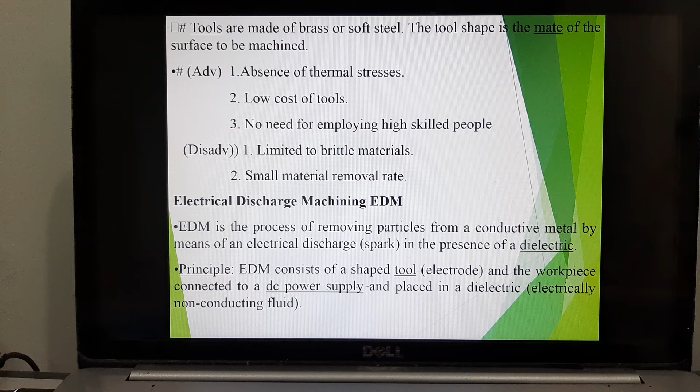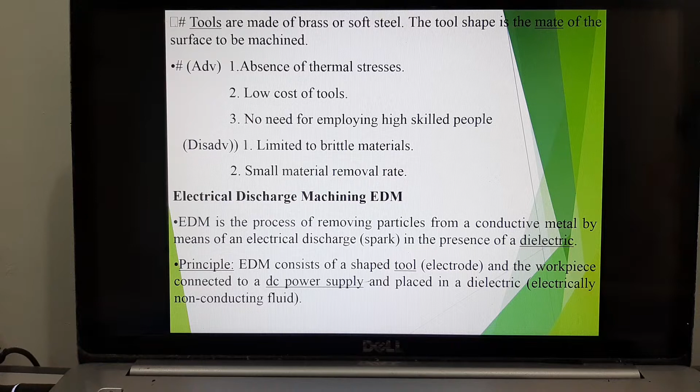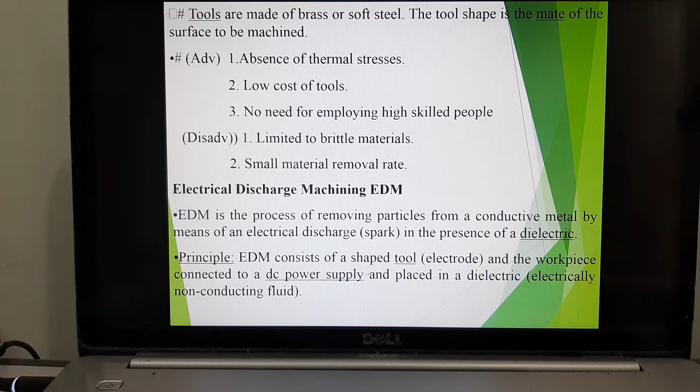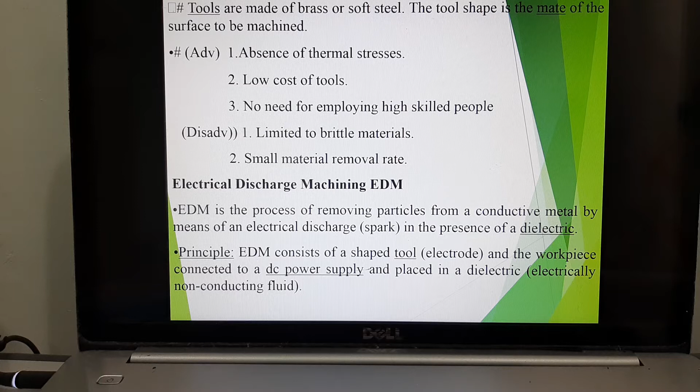If you recall, in the last class we spoke about ultrasonic machining. It was made of a transformer that generates electricity and ignites the transducer. The transducer oscillates at 30 or 25 kilohertz, causing the tool to oscillate and stir the abrasive solution, made of silicon carbide, aluminum oxide, and boron carbide. The abrasive liquid rubs against the surface of the workpiece and removes material.

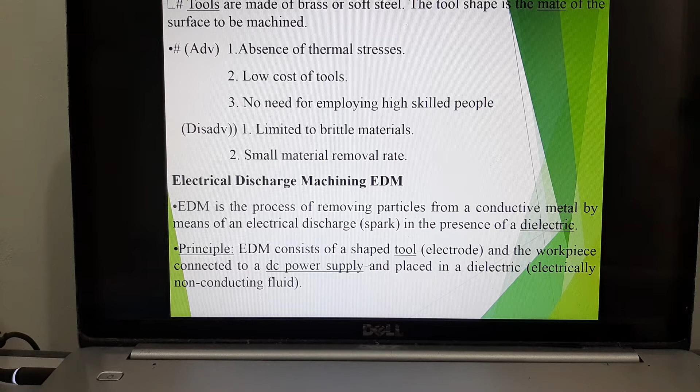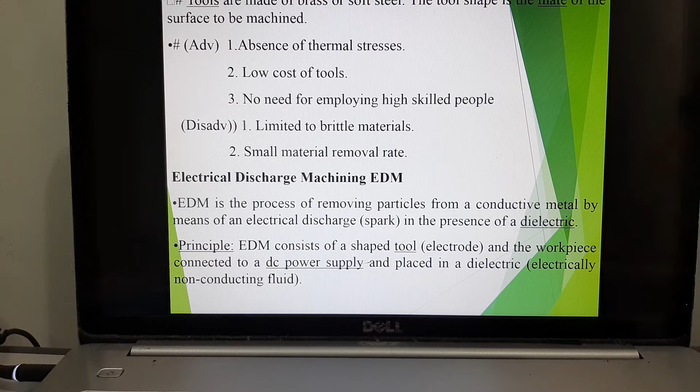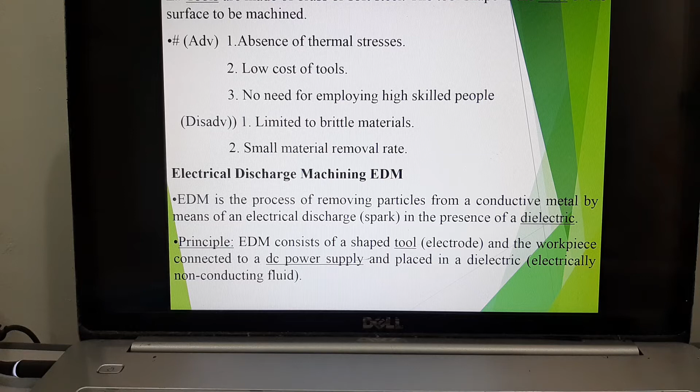So when it's removing or machining the material, is it visible? No, it's not, because you're removing micrometer or nanometer size material. It's very minute, not visible to the naked eye. That's why we have a mainframe to monitor the material removal rate in the X, Y, and Z axis. Once it has achieved the value you want, you stop the machining process.

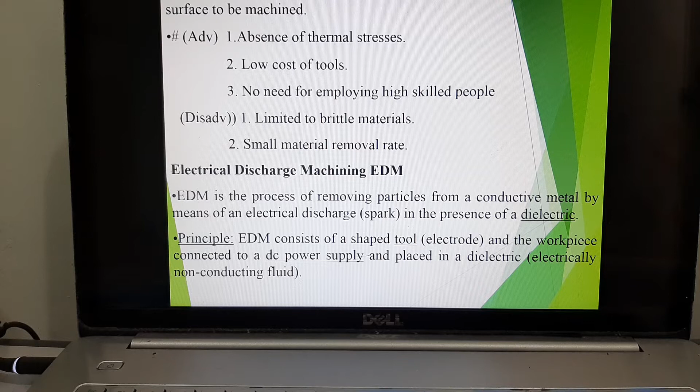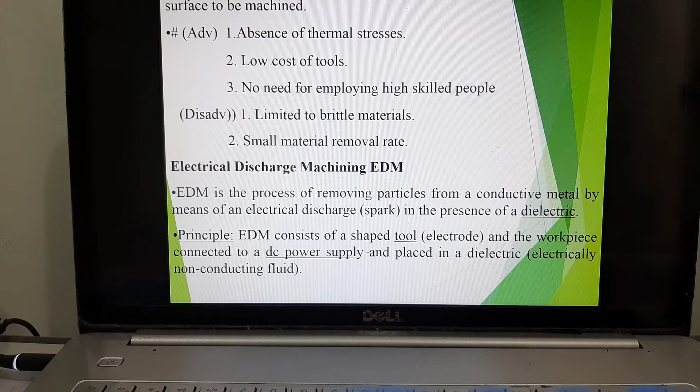Because of that very reason, you choose to do ultrasonic machining and not normal conventional machining. So moving on, let's look at the next one: electrical discharge machining.

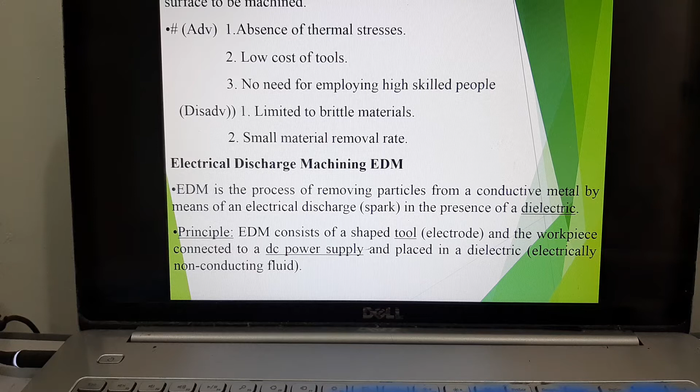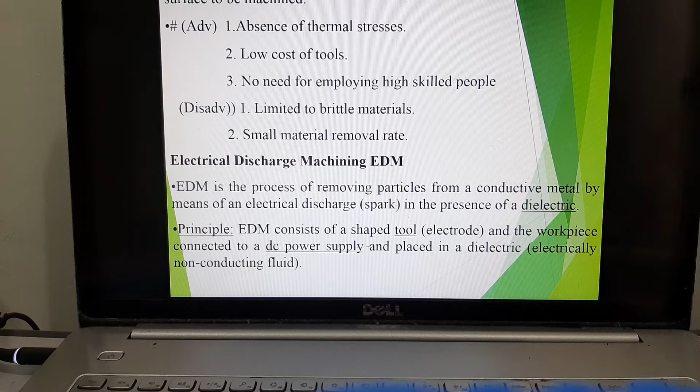EDM, or electrical discharge machining, is the process of removing particles from a conductive metal by means of an electric discharge in the presence of a dielectric. The key word here is conductive material. Your material has to be conductive, meaning it has to be a metal. Only metal conducts electricity. Any kind of metal can be machined under EDM.

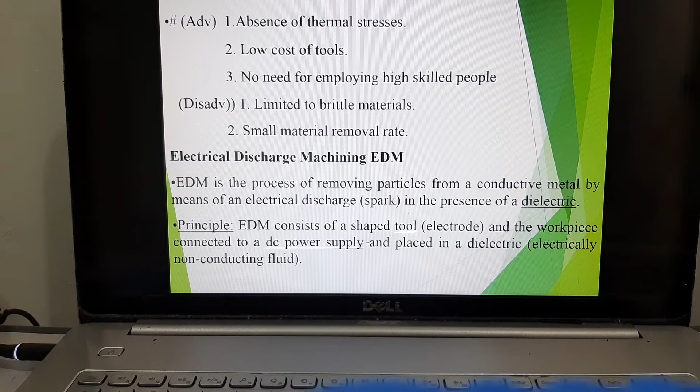Can you machine ceramic? No. Can you machine glass? No, because it is a non-conductive material. So how does this EDM work?

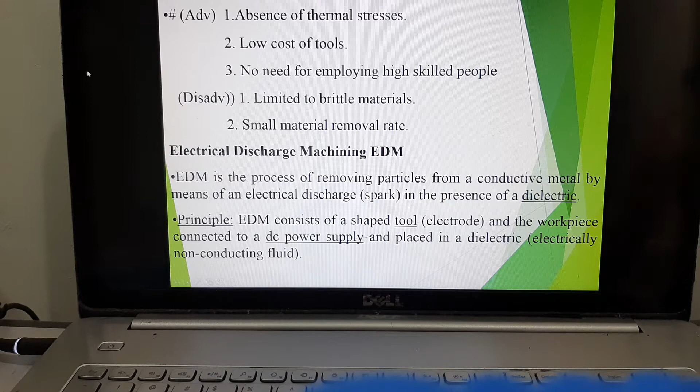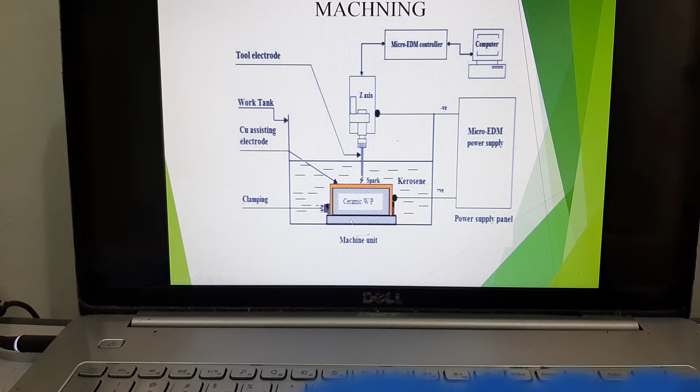EDM consists of a shaped tool or an electrode, and the workpiece is connected to a DC power supply placed in a dielectric. What is a dielectric? It's an electrically non-conductive fluid. Here is your workpiece, placed in kerosene, and it has to be a conductive sample.

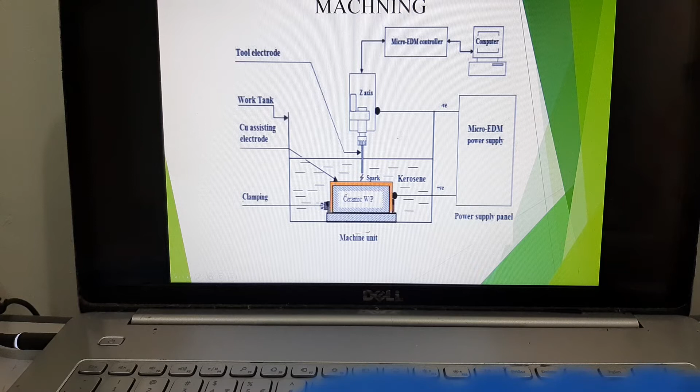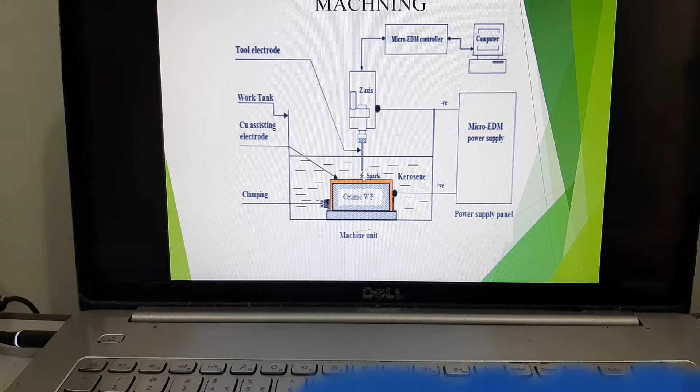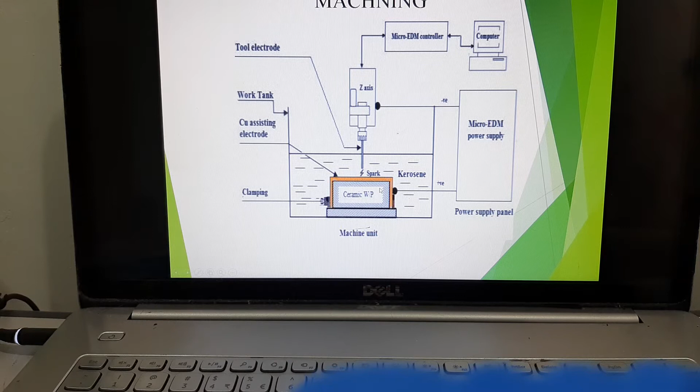When you immerse it in kerosene, there has to be a space between the electrode and the workpiece, because that space allows you to ignite a spark. Every time a spark is discharged, machining takes place. It removes a layer of material, but not a specific shape. If you want to cut out a butterfly shape, can you do it here? No, you cannot. It's just for very basic machining.

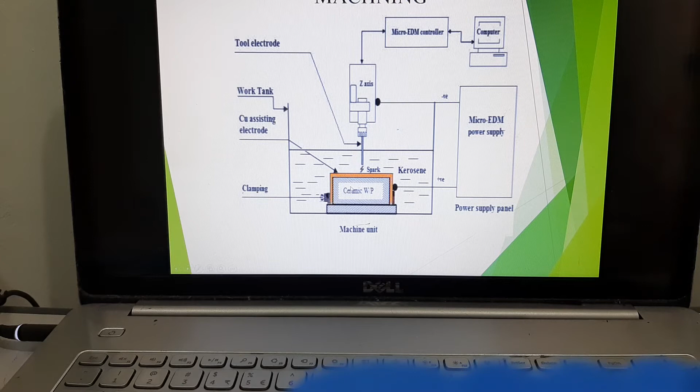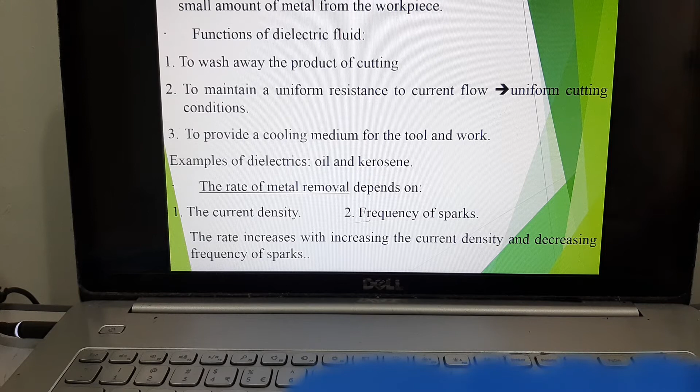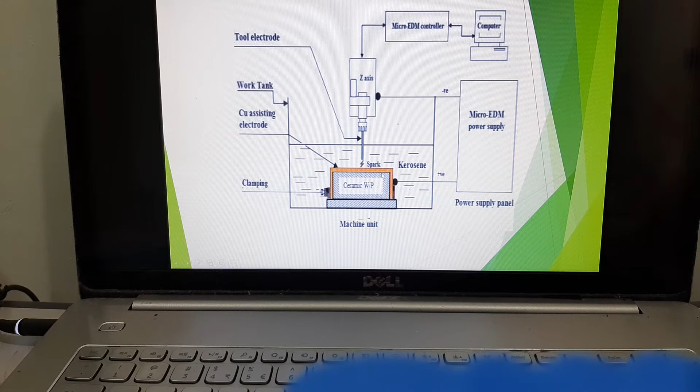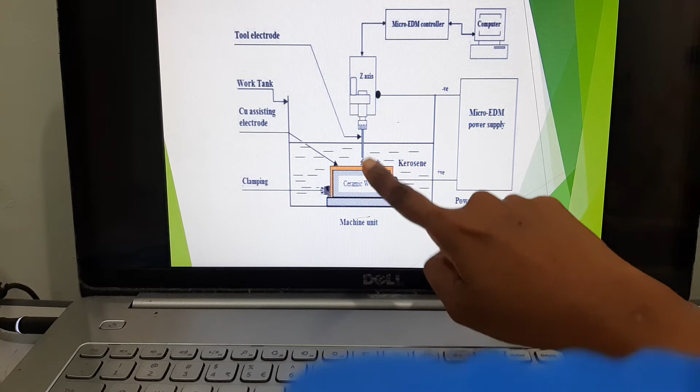Looking back at the description, when the potential difference between the tool and the workpiece is sufficiently high, it overcomes the dielectric. Here kerosene is your dielectric, with a positive and negative terminal representing the tool and the workpiece. When the potential difference is sufficiently high, it starts to discharge a spark, and every time a spark is discharged, material removal takes place, in the micrometer or nanometer range, overcoming the dielectric fluid.

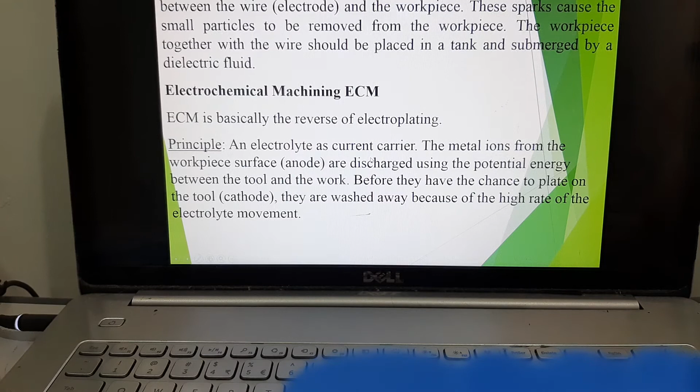Functions of a dielectric fluid - in our example we used kerosene. What's the function of kerosene? To wash away the product of cutting, to maintain a uniform resistance to current flow, meaning when there is sufficient potential difference it discharges a spark, so current is conducting. This uniform resistance gives uniform cutting conditions, and it also provides a cooling medium for the tool and the work. Examples of dielectrics are oil and kerosene.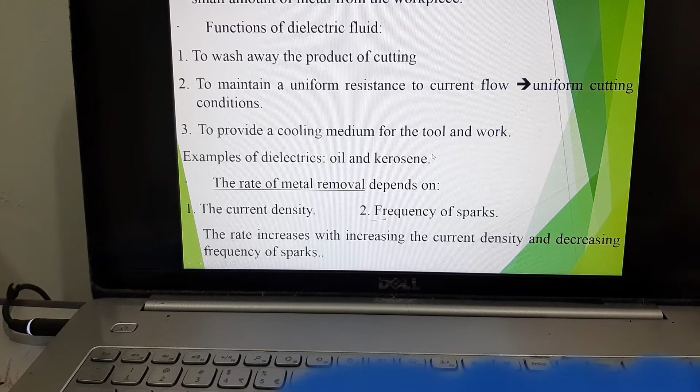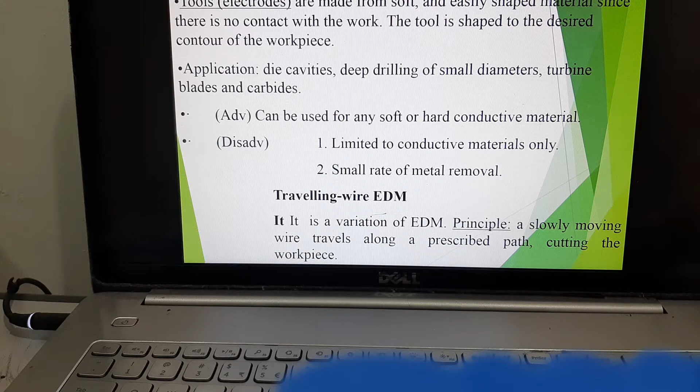So your tool has to be designed or shaped to the desired contour of your workpiece. How you want your workpiece to be, that's how your tool is going to be shaped.

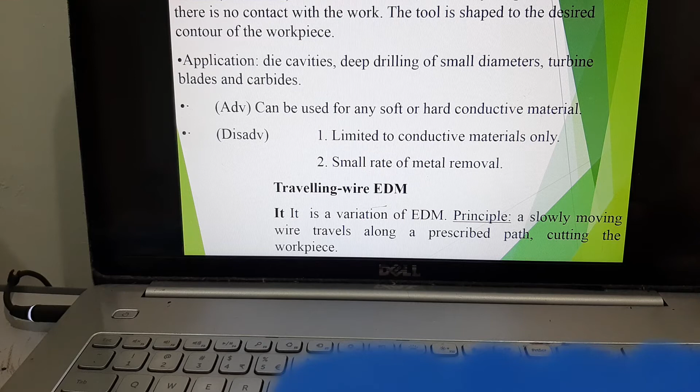So where do you use this electrical discharge machining? In die cavities, deep drilling of small diameters, turbine blades and carbides.

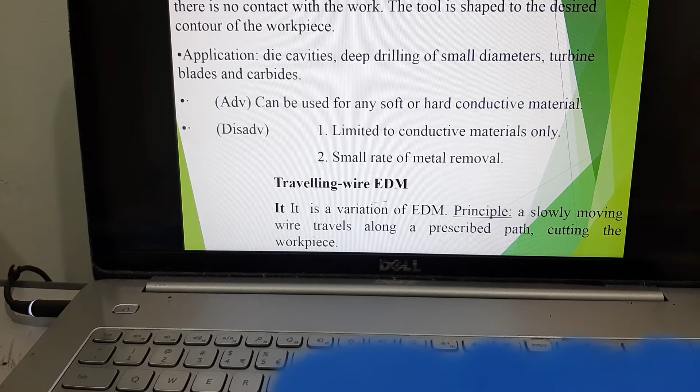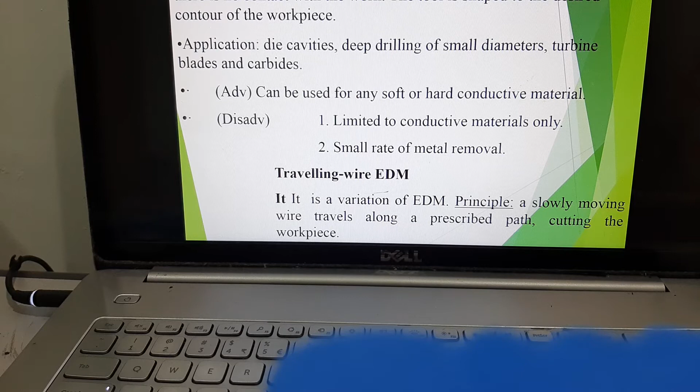Advantages: it can be used for any soft or hard conductive material. Disadvantages: it's limited to conductive materials, you cannot use it for a non-conductive material, and it has a very small metal removal rate, very very minute, removing nanometer, micrometer size material. So it's more of a precision machining rather than large scale machining, or macro machining.

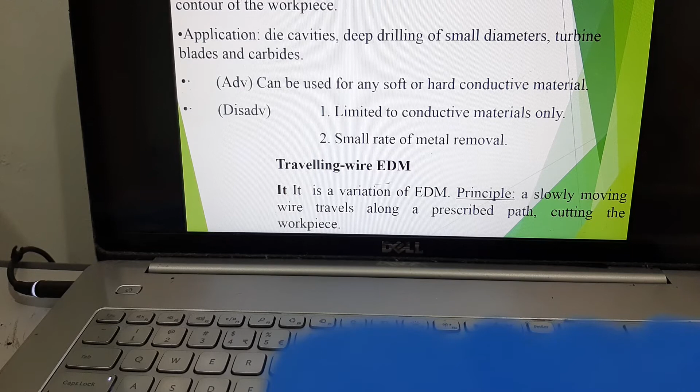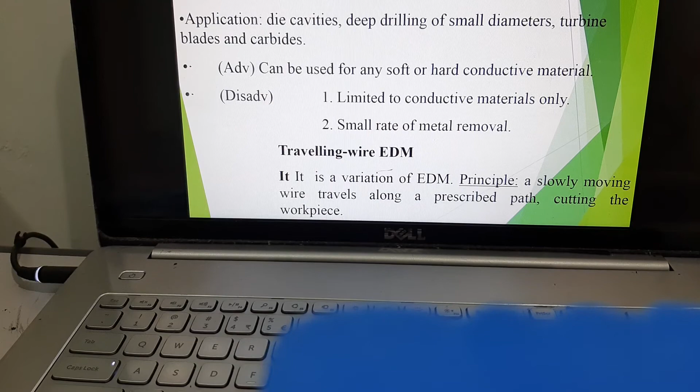If you're going to remove lots of material, then you might as well use some other processes like metal cutting, or you can use CNC lathe, CNC mill. But in this case, because you're doing micro machining, meaning you're removing micrometer and nanometer range materials, you need to use this particular material machining technique.

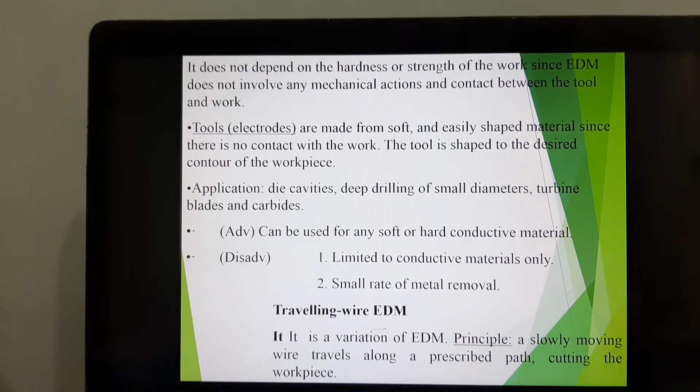So next one, traveling wire EDM. What is traveling wire EDM? It is a variation of EDM. A slowly moving wire travels along a prescribed path, cutting the workpiece.

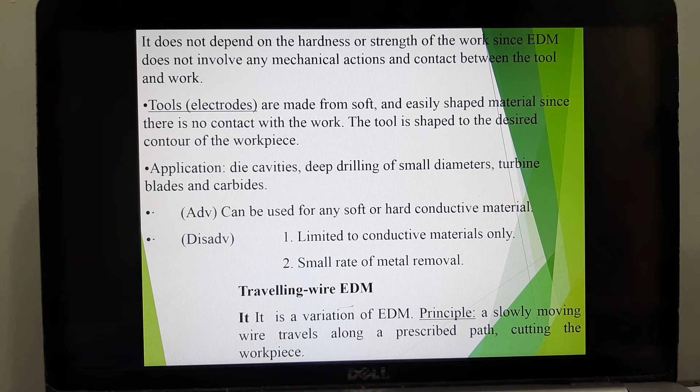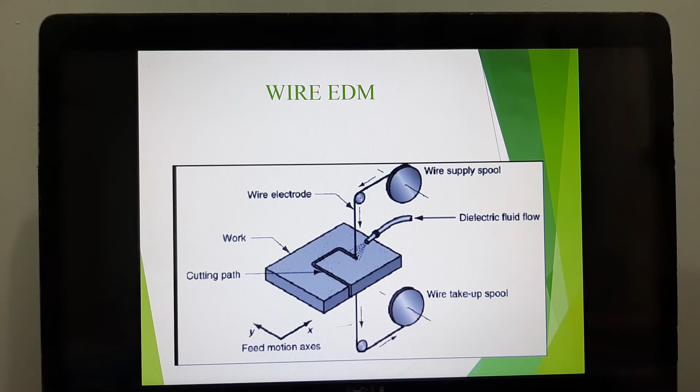If you look at the diagram, this is your wire EDM. You have your wire - the same concept. This is your wire electrode and this is your workpiece. When the potential difference is sufficiently high between the electrode and the workpiece, it will discharge sparks and it will machine.

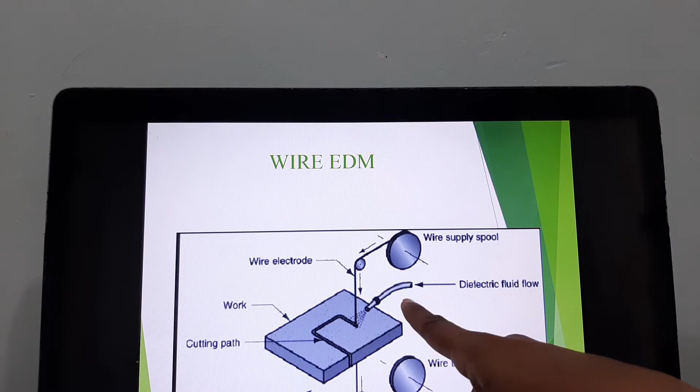And you're going to supply the dielectric fluid through a hose. So what you see here, it's like taking a scissors and cutting out the shape. You're doing it with a wire. The wire actually follows the dimension that you have given.

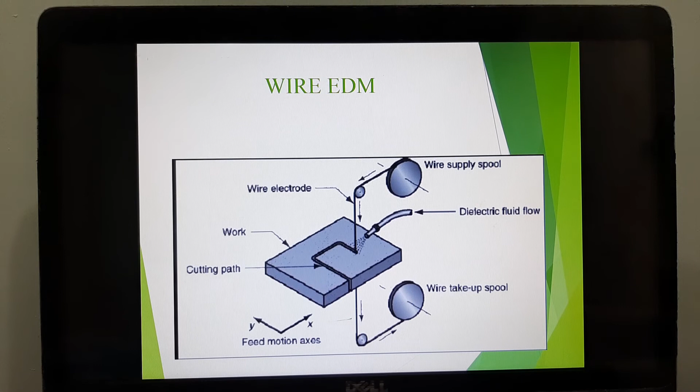So you have a main frame. In the main frame, you already have your path defined, your machining path defined. So you just instruct your wire to follow that path to machine out the product, or to machine out the part.

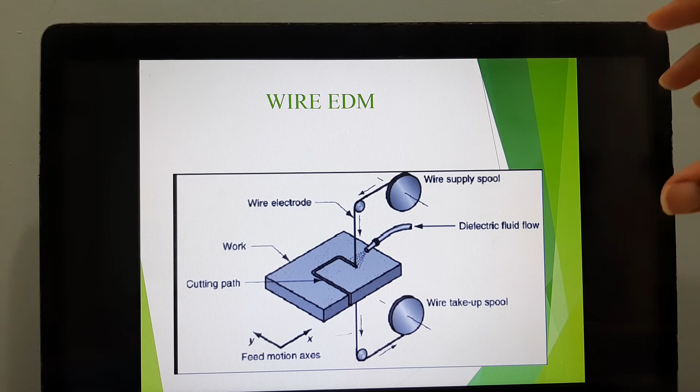So say you want to machine out a butterfly shape - you have already defined that in your mainframe. The dimension for that butterfly shape has been defined in the mainframe, and when you press the start button, automatically the potential difference will start increasing. When the potential difference is sufficiently high between the tool, which is your wire, and your workpiece, then your machining starts. It will be able to machine out the butterfly shape precisely.

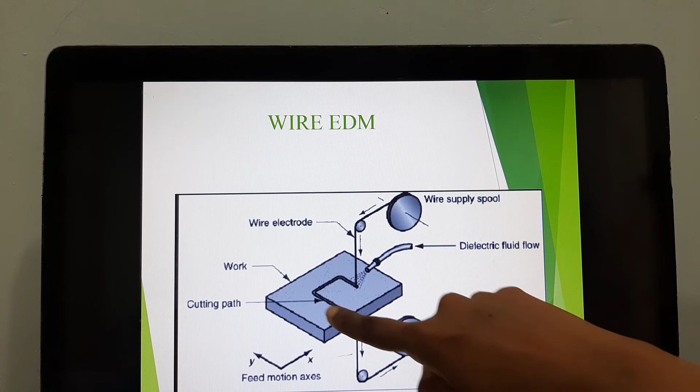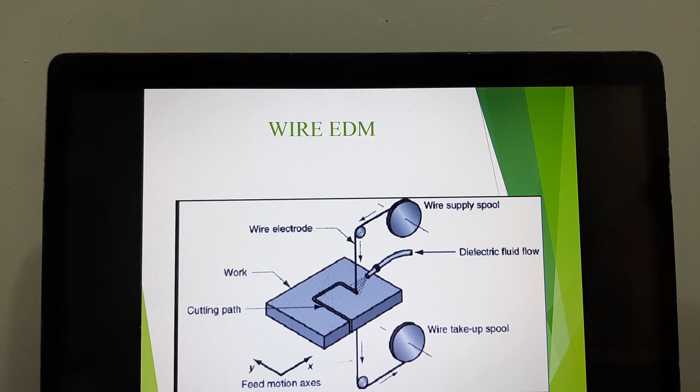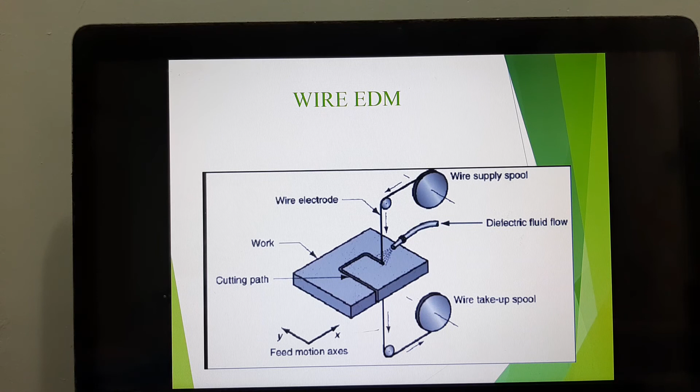It's just like taking a scissors and cutting out the shape exactly, following the lines, the dimension exactly and precisely. So you do not need to do any other sorts of machining or material removal after that, because it will cut out the perfect shape for you - a butterfly shape, a heart shape, whatever shape you want, it'll machine out that perfect shape for you.

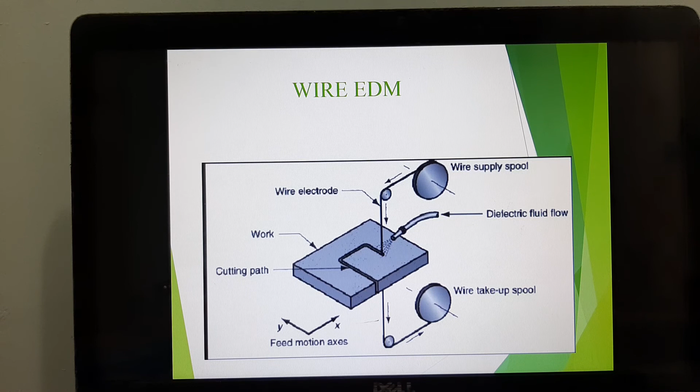So that is wire EDM. The difference from normal EDM is that it just does surface machining, so there has to be a distance between the electrode and the workpiece, so that when you discharge a spark, material removal takes place.

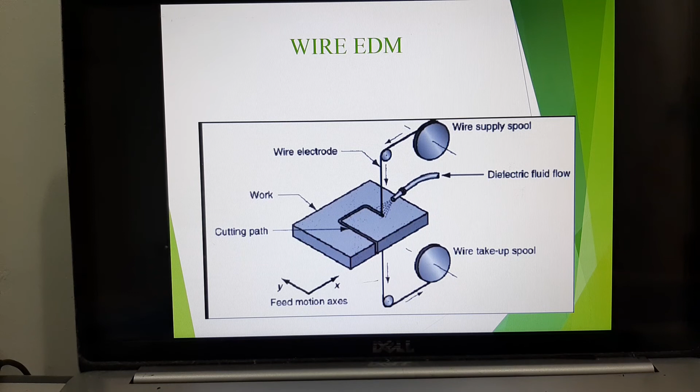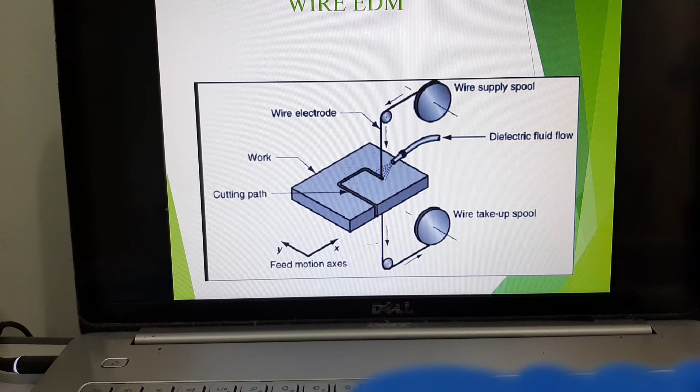Same thing over here, but here you're using a wire instead of an electrode. The electrode comes in the form of wire, and the wire will be able to follow the defined path, so you are able to get the exact shape, just like taking a scissors and cutting out the shape. So that is your wire EDM.